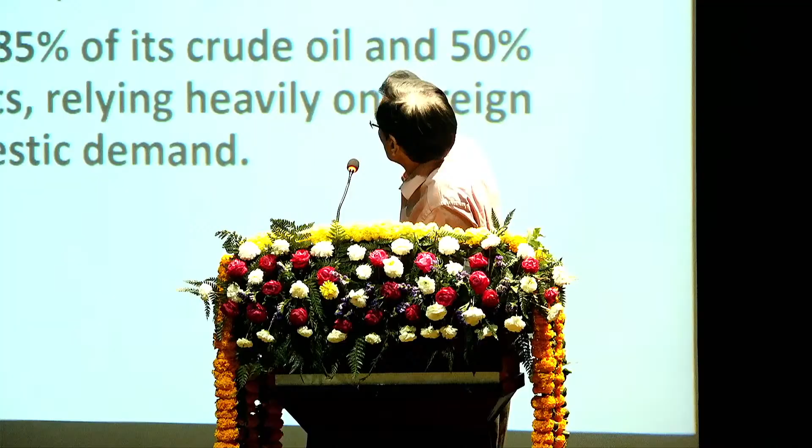Anyway, let me now concentrate on coal. So now, Atmanirbhar Bharat wants to go to net zero emissions by 2070. As of 2025-26, India is the third largest consumer of energy, and we are the third largest producer of electricity also. So the India is the third largest consumer of oil, and we are vulnerable to global price.

Now we are at the same situation. Yesterday I was watching, in Pakistan there is no electricity after 8 o'clock. Fortunately, we have Modi ji, so we are happy. We are having all these, we are still not affected. But there's going to be a lot of problem because of the oil shortage.

India is the second largest producer of coal in the world after China. Earlier we used to mine 250 million tons of coal. Today we are mining 1 billion tons of coal. You can imagine, we are burning 1 billion tons of coal, how much fly ash we are generating, and that fly ash has to be utilized. That is also one of the major problems.

It has to be used in cement plants, for brick making, and other things also. So 50% of installed power capacity is solar energy based, but most of, as I told you, 70% of electricity is coming from coal only, burning coal only.

Well, you see, the government of India, there is a lot of pressure now. They want to shift from coal to solar, wind, and other things. But we have large reserves of coal. What to do with those?

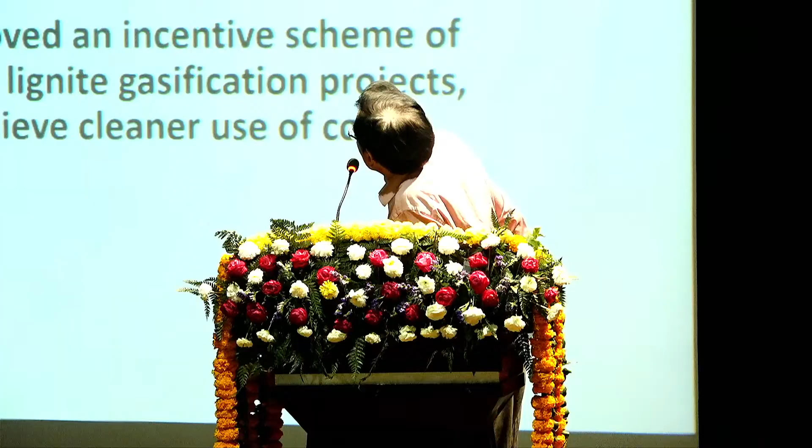Okay, well, the government has production-linked incentives, so it is promoting coal gasification. As far as gasification of coal is concerned, as I told you, Indian coal is having high ash. So in situ ash content in Indian coal is 35%. So it is not a joke to gasify, to partially burn this coal.

We had 3 coal gasification plants, Talcher, Ramagundam at Neyveli Lignite Corporation, and we were using the entrained bed process, Koppers-Totzek. And those were for fertilizer plants, fertilizer plants were based on that. And those plants almost failed, and those have been stopped.

But now interest has revived in setting up coal gasification again. Coal India Limited has signed a memorandum of understanding with BHEL, GAIL, IOCL. BHEL has plants on fluidized bed gasification of coal. They had a pilot plant. EIL also had a pilot plant. CIMFR also had several plants. The ministry had invited me to give a lecture.

So I told them we have to do research on Indian coals, and we should do R&D. We should sponsor projects to IITs and universities so that some research is done on how to gasify Indian coal having such high ash content, and which process will suit - whether fixed bed, entrained bed, or fluidized bed.

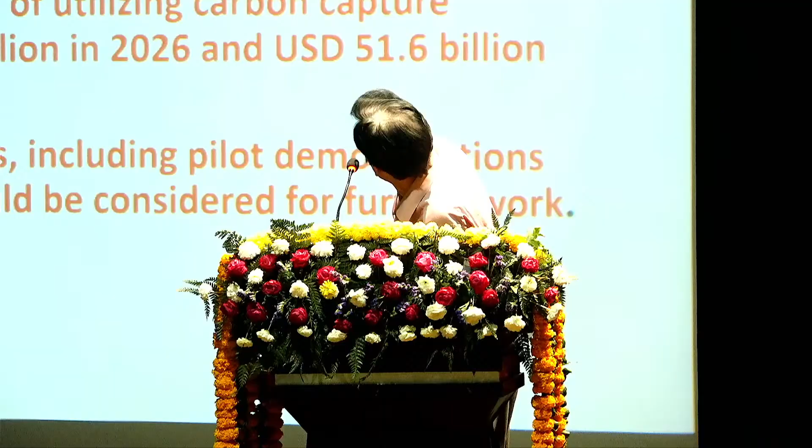What I feel is that we can continue to use coal if we can sequester and capture the CO2 and utilize it for value-added uses. We have extended some research at IIT, and a lot of research has been done. In fact there is a lot of funding - around US dollar 5 billion in 2026, and this will become almost 51.6 billion by 2030, according to IEA. There is a lot of work going on, with successes reported, and pilot demonstrations by BHEL, CIMFR, and at IIT Delhi.

CCUS technologies may allow continued use of coal. That can be very good for India. We can even have IGCC power generation - integrated gasification combined cycle power generation - where capture of CO2 is very convenient and very easy.

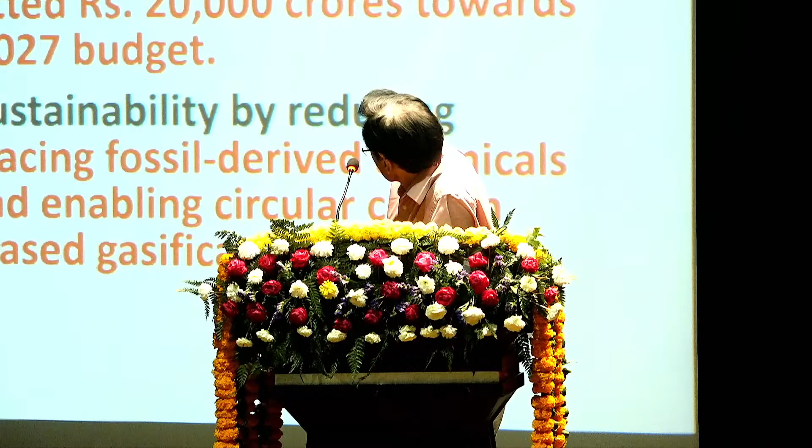The Indian government has committed 20,000 crore towards this in the current budget, 2026-27. Coal CO2 utilization contributes to sustainability by reducing greenhouse gas emissions, and replacing fossil-derived chemicals with CO2-based alternatives may enable a circular carbon economy.

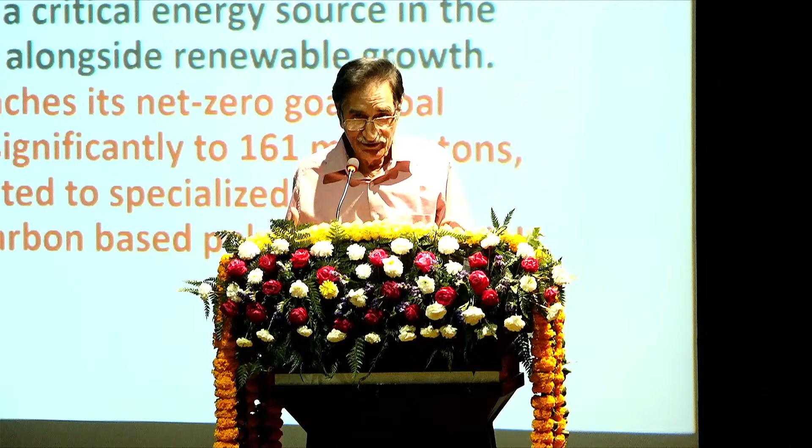Future-proofing coal assets as renewable energy penetration grows means diversifying non-fuel uses of coal. The future outlook: despite this shift, coal will remain a critical energy source, though by 2070 it is planned to come down to 161 million tons per annum. But I doubt it, as far as India is concerned we have only coal. We are going for ultra supercritical boilers where CO2 emissions are less, and more and more mines are being auctioned, so more thermal power stations would be set up. I doubt it, but I am a coal man - you can take it with a pinch of salt.

We worked on coal at IIT Delhi for almost 42 years, covering almost every aspect of coal. We worked on converting coal into oil, through solvent extraction followed by hydrogenation of the solvent extract to get petroleum-like fuels.

Then we worked on gasification of coal. We even used CO2, we used steam, and got synthesis gas. We also did some work on carbonization of coal, that is pyrolysis of coal, which is heating the coal in the absence of air in an inert atmosphere. There we get coal tar and other coal gas, and we also get some char.

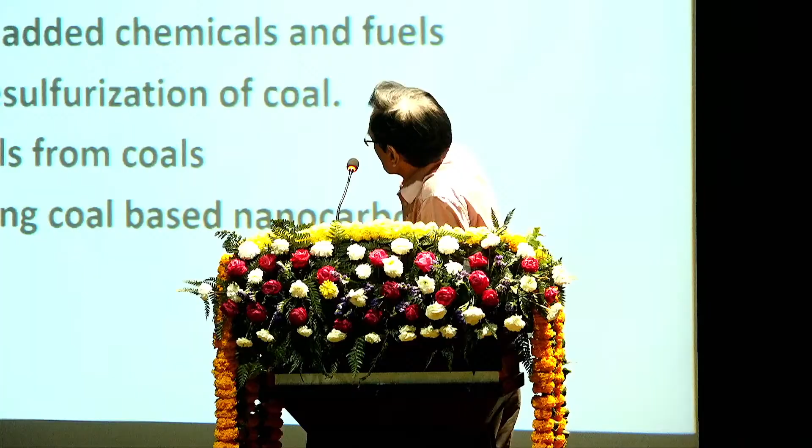Then we worked on refining the coal - organo refining, inorgano refining - and we worked on other clean coal technologies like biodesulfurization and chemical desulfurization of coal.

India is very fortunate. We have only 0.5 to 0.6% sulfur in our coal, whereas Western coals have high sulfur. But our lignites contain almost 5 to as high as 10% sulfur. Assam coal, which is a good quality coal, has ash around 5 to 10%, but sulfur contents may be as high as 5 to 10% even. We have worked on Assam coal also.

Then we tried to convert coal into graphite through graphitization, and we also converted coal into carbon nanomaterials such as graphene and multi-walled and single-walled carbon nanotubes and other carbon materials. Then we used those graphene and carbon nanomaterials for producing carbon-based nanocomposites, which have better conductivity, better EMI shielding properties, better thermal conductivity, electrical conductivity, and mechanical strength.

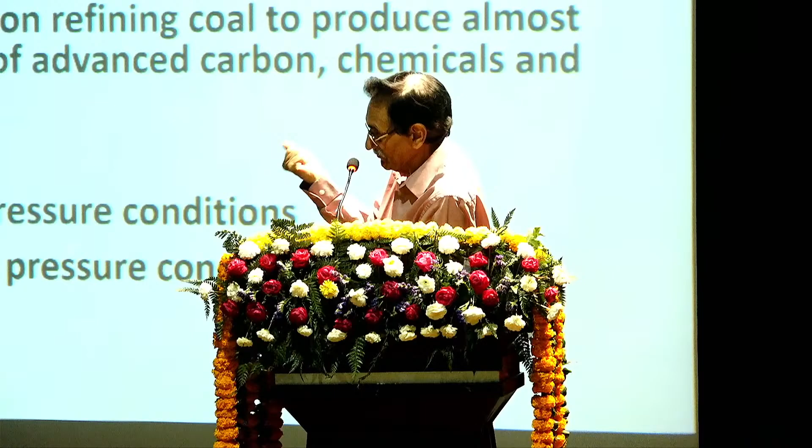I've already discussed how we started our research. Then ultimately, when oil prices became very cheap, we thought of concentrating our research on refining coal to get low ash coal and improving the washability characteristics of coal, which we thought of doing through organorefining. Coal contains organic matter and inorganic ash, inorganic mineral matter. So if you use some solvent which can dissolve and extract the organic matter, what will be left behind is inorganic matter, with less ash, to prepare chemicals. The other approach was inorganic leaching, where you use alkali or acid to remove inorganic matter and leave the organic matter behind. So we worked on both parallel approaches.

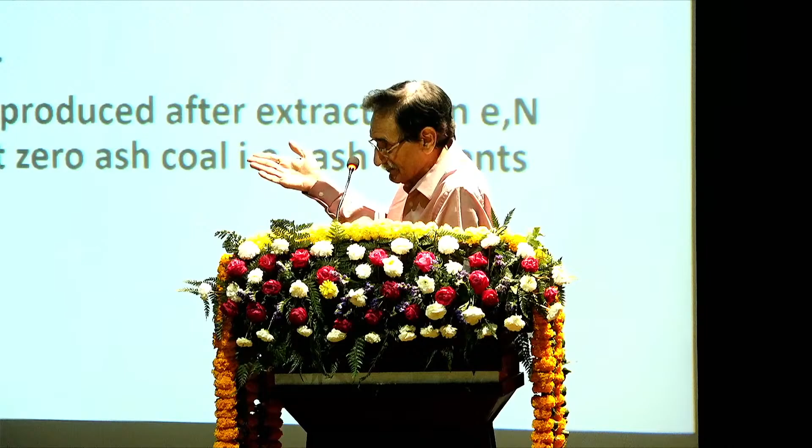clean coal. We called it super clean coal because it has very little ash, varying from 0 to 2%. So we published that paper, and there was a lot of hue and cry in India. People said it was something very unusual - how can you have zero ash coal? So a lot of discussions went on in CSIR, CIMFR, and DST. They gave us a project, and we proved that yes, coal can have zero ash also. In fact, the coal had 0 to 2% ash.

Next slide. We thought of using that super clean coal for getting graphene and carbon nanotubes. So we collaborated with NPL, and we used the DC-arc discharge technique to convert this super clean coal into graphene and

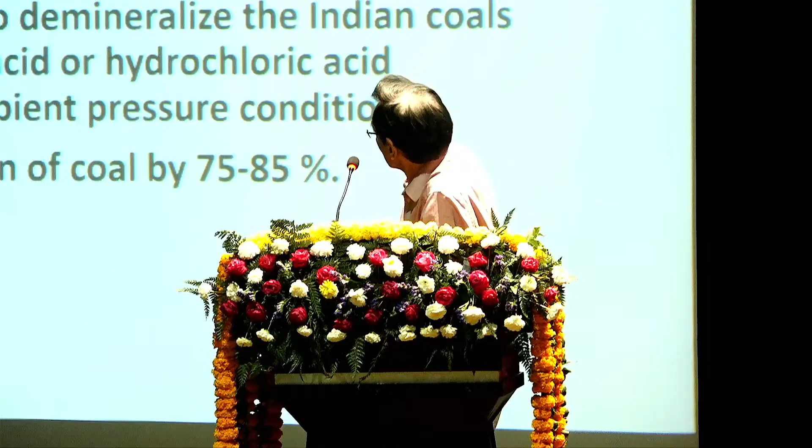Well, after we published that paper, people from Tata Steel came to my lab. They told me I had published that coal contains 0 to 2% ash, whereas they were pioneers in washing coals, and said as far as they were concerned, they couldn't go beyond 20% ash coal. I told them yes, this is possible. Then they sent their engineer to my lab, and we transferred that technology to Tata Steel. They set up a pilot plant at Kolkata. We filed several patents, including US patents, and they set up this pilot plant.

They set up another plant at Visakhapatnam based on inorganic leaching of coal. As Professor Subhash Sharma will agree, at IIT there is a lot of thrust on patenting and technology transfer. Professor Nigam used to pester us about how many technologies we have transferred to industry. I'm very happy to have worked with Tata Steel and transferred this technology to them. They have a mine containing 21% ash, and they use coking coal for their steel plants. With my technology, they can happily do that, but unfortunately this is not economical at present, so importing coking coal is cheaper for them. Still, they have this technology with them.

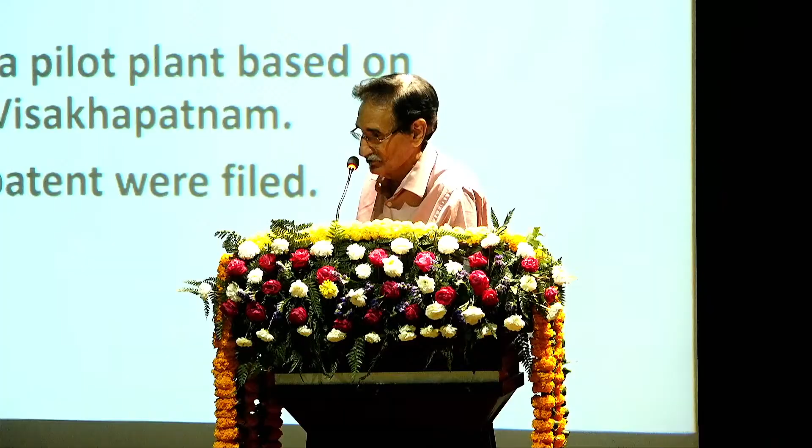We have also converted carbon dioxide into graphene using magnesium ribbon and nickel as a promoter. We used those graphenes for preparing polycarbonate nanocomposites, which had good conducting properties, thermal conductivity, electrical conductivity, mechanical strength, and EMI shielding properties.

I don't have much time now. We also did some work adding multi-walled carbon nanotubes into polycarbonate polymers, and we were able to improve its ballistic properties, so you can have bulletproof jackets. We did this work in the mechanical engineering department at IIT Delhi, in Professor Naresh Bhatnagar's lab.

That's the detail of how we did it. Then we improved the ballistic properties.

In conclusion, I would say that we were able to clean the coal and transfer the technology to Tata Steel, and they have set up a pilot plant. Then we were able to convert the coal into carbon nanotubes, multi-walled carbon nanotubes, and graphene, and use those for preparing nanocomposites which are very useful in industries. We also could improve the ballistic properties of these. Thank you very much, I'll be very glad to answer your questions.

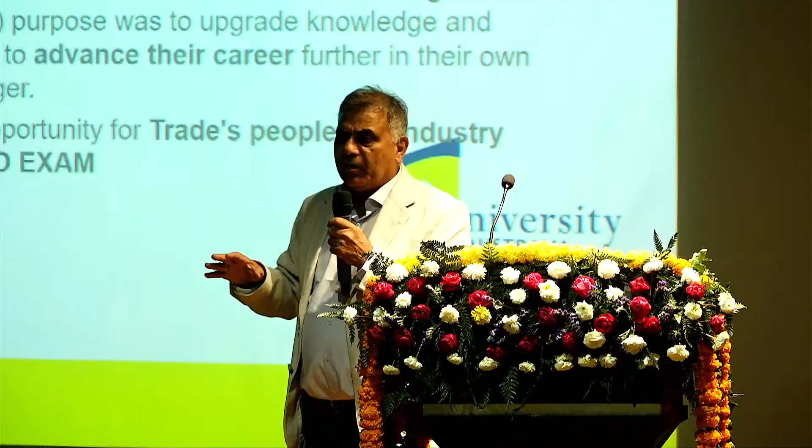Especially, the course that I was heading, not now, I stepped down, is the asset and maintenance management program. As a mechanical engineer, you might have noticed there are heat, thermal, production engineering, manufacturing engineering, and so on. But this asset or maintenance management course evolved on a direct demand from industry. That demand was from Queensland Alumina Limited—those people approached us and said they wanted to give training to their staff and make them maintenance experts. That is how it started.

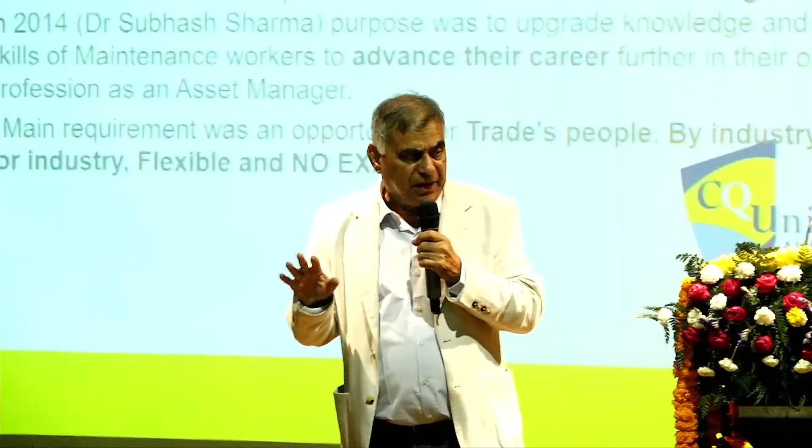But in 2014, when the ISO standards came into the market—ISO 55000, 55001 and 55002—I was given the responsibility to develop a course based on asset management rather than maintenance management. Maintenance is a subset of asset management, whereas maintenance engineering itself is a subset of mechanical engineering. Please, next.

We have got around 32,000 students, and at the moment we have 16 campuses because 10 campuses have been either merged or shut down. Most of the teaching is via long distance, or online. So this is Australia.

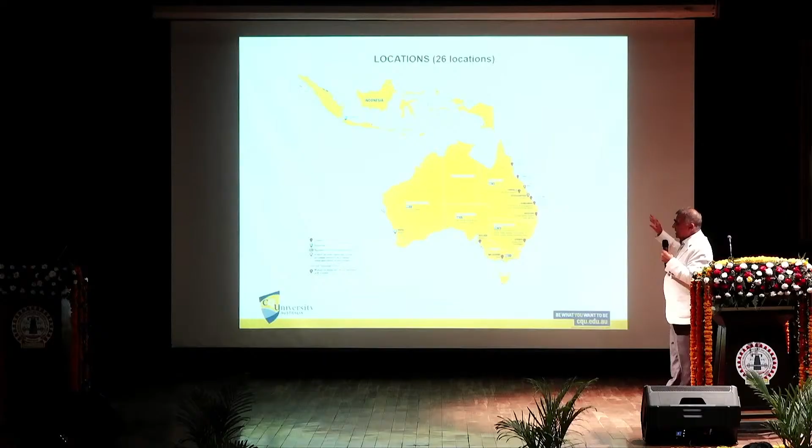Over here you could see that there are so many campuses. Along with that, there is a campus in Indonesia. Earlier it was in Singapore also. And recently we had a collaboration with Kuwait, that is a research collaboration.

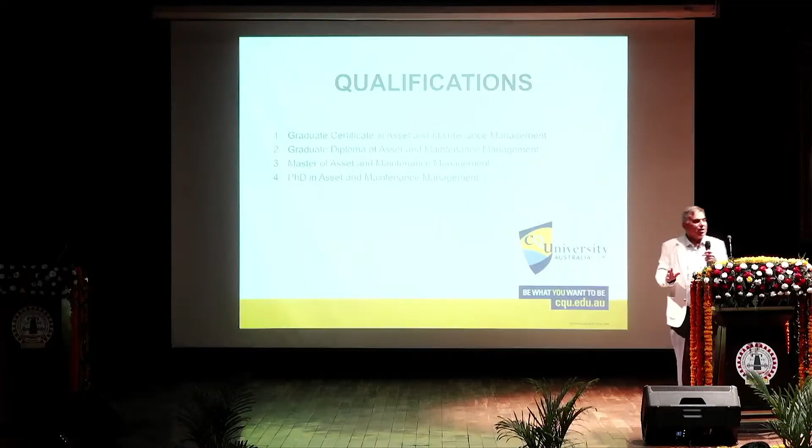I belong to asset and maintenance management, so graduate certificate, graduate diploma, masters and PhD, these are the degrees that we give, and we have got about 400 students altogether.

So what we teach under this is procurement, operation, maintenance and disposal. Any item or entity or a thing, it has been written in the definition like that. Anything or entity that has a value, that is an asset.

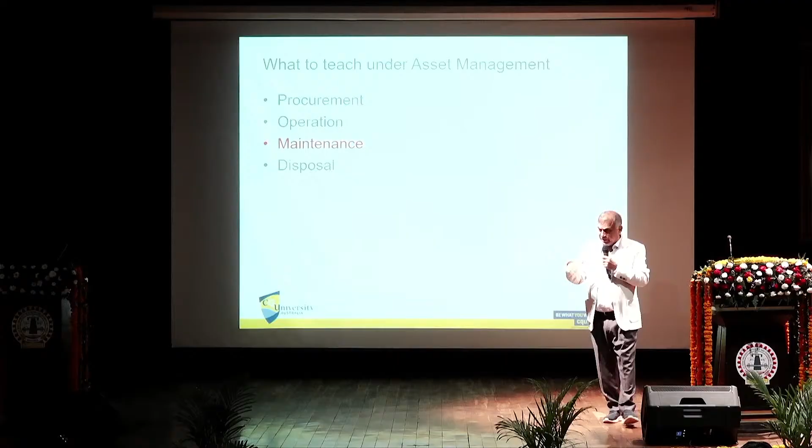Like Dr. Sharma was saying, the fly ash that is coming out, if it has got a value, that is an asset. So you have to extract that value, you have to realize that value out of the product or the asset. That is the purpose of this engineering. And as a mechanical engineer, any industry that is asset intensive, that is where our main focus is.

Say, for example, 2600 BC, people had these carts in Egypt. That means it shows that people had those manufacturing capabilities. And if they had manufacturing capabilities, they too had a concept, maybe a vague concept of rolling motion, because there are wheels and there is an axle. So if that is there, likelihood that by that time people might have developed a lubricant as well.

Though evidence of lubricant in Egypt comes a lot later, not in 2600, but maybe 1500 BC or something like that, people used to use lard oil to transport big structures. So the lubrication concept was not well understood, but it was there.

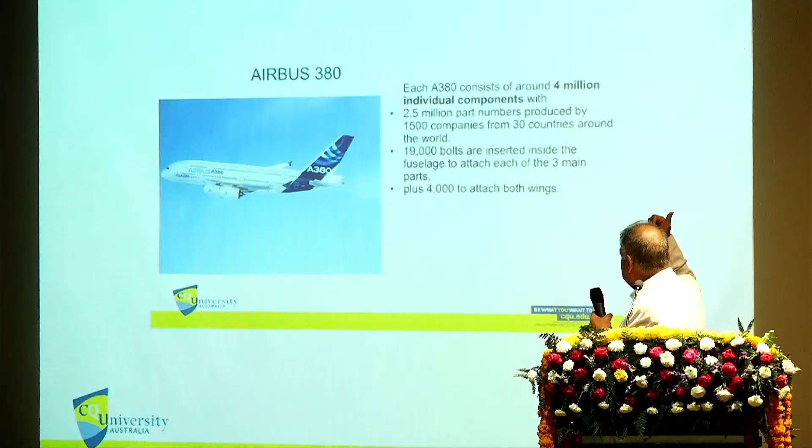You people might have heard that in any industry you go, there's a top boss, then there is a department, and the department is the human resource department. There may be power generation or accounts and this and that, and then there is a human resource, HR department. So the HR department handles human beings, their induction, their training, their retirement, all those things.

But if you have seen or not, any industry, they don't have a similar parallel ground, any asset department like HR department. And that is what is happening now, that people are realizing that like human beings are being managed, we should manage the assets as well. So that used to be.

Now, a simple thing, like in the morning I said, the plan, do, check, act. Here it's plan, acquire, operate, maintain and dispose. Any entity or any asset that you have passes through these stages. You have to plan whether you want to procure, whether you want to hire, whether you want to build, whatever you want to do.

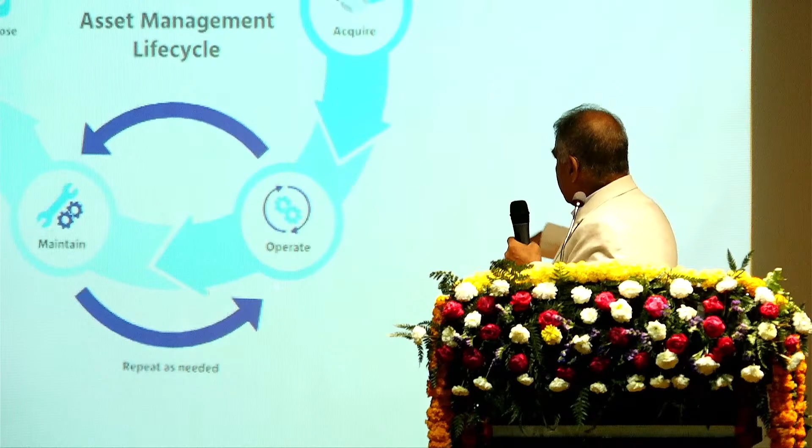And then you acquire that. After acquiring, you use it. So when you are using this asset, that may be a machine, that may be a computer, that may be a table, whatever it is, during that use is when you need maintenance.

So maintenance, and then when its life is over, we will say why life is over. Basically, it should never be over. But when, due to normal wear and tear, the components don't perform the function for which they have been designed, then you call it failed.

And if you repair it, if it is beyond the cost effectivity, then you dispose it off. And disposal means a responsible disposal, not like batteries, you put it in the normal dustbin. So that is called the asset life cycle.

Anything that reduces life cycle costs, that is asset management principles, asset management leadership, risk management, data management, continuous improvement, reliability, health and safety, asset management tools, environment standards. So all these things are associated with those machines with whom you will be working if you are working in an industry.

When you deal with this, anything that reduces the life cycle cost, it's not like you have dug out the lithium and made the battery, and in order to take out say 10 grams of lithium, you might have excavated say 20 tons of earth, and spent more energy excavating rather than getting the 10 grams of lithium. I'm just giving you an example.

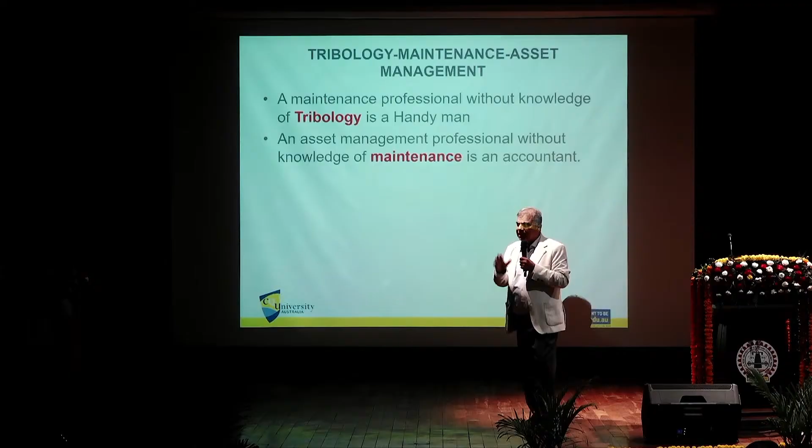Here I want to say that when you are working in an industry, anybody who is a maintenance engineer, you can become a good maintenance engineer if you are clear about the fundamentals of lubrication, friction and wear. If not, and you are just doing repair, that means you are not doing a responsible job, okay? You are just like a technician.

I might give you an example. I did some consulting job, and they said my bearings are failing. When it's a cotton industry, I said, are you giving enough oil? They showed me a person giving oil, and oil is overflowing. But the thing is, where the oil should go, those are clogged, and he is putting oil everywhere. So if it is not at the right place, that means it's not the right practice.

So that means unless you have a good knowledge of tribology, you cannot be a good maintenance engineer.

Similarly about assets, when you are a maintenance manager, you are buying a machine, you are an engineer, you may be a production person, but decision is made by whom? By the accountants. They tell you that you have to buy the cheapest machine. And the operation people, the operator, wants the best machine no matter what the cost is. And the maintenance person who is responsible for maintaining that has no say.

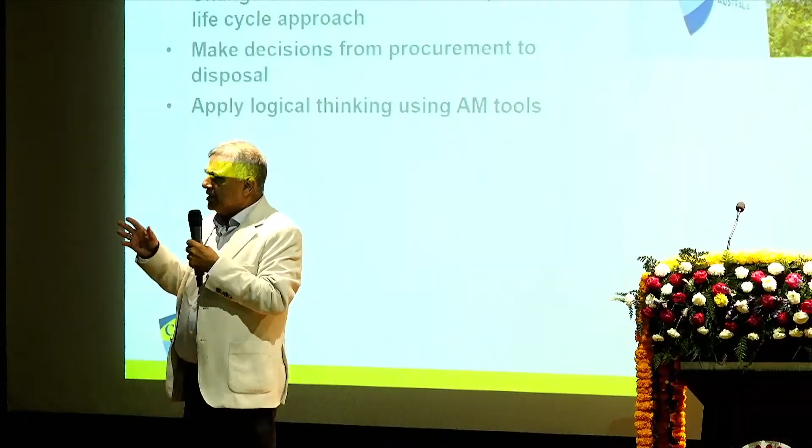So here, if you are a maintenance engineer and you do not have knowledge of assets, or if you are an asset manager and you do not have knowledge of maintenance, that means you are simply an accountant. So there is a difference between an accountant and an asset manager, and there is a difference between an engineer and a maintenance engineer who does not know tribology.

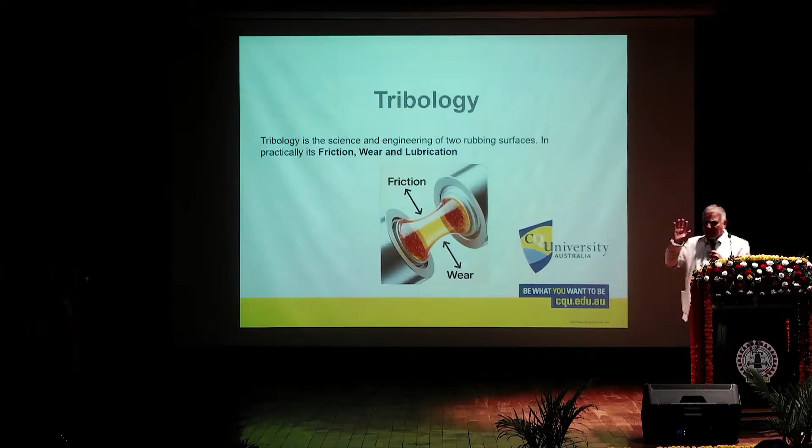So as such, there is friction and wear, and then there is lubrication. These three things are a must. I should keep a track of time, perhaps just show me, give me a signal when there are 5-10 minutes left. Go ahead please, next please.

The objective of tribology is basically to conserve material, conserve energy, and manufacturing efforts. By reducing friction, say in a ball bearing, how much is the friction? I developed equipment at IIT Delhi to measure the oil film thickness in a ball bearing, which is up to half a micron thick, and the friction there is hardly 0.001. So those are the kinds of things: conservation of material, energy, and manufacturing efforts. The bearing you buy for $20 or $10, what is the cost of the bearing? It's 100 grams of steel, which may be $2, but you pay $20 because of the manufacturing costs. So those manufacturing efforts are also saved.

Okay, please, next. I know I won't be able to cover the whole thing.

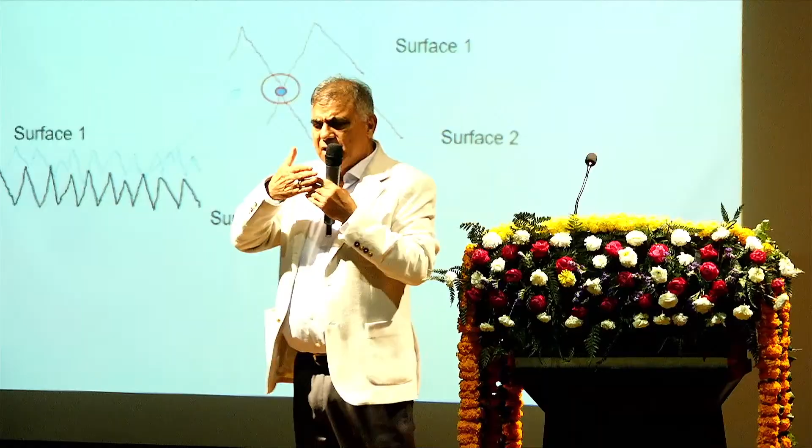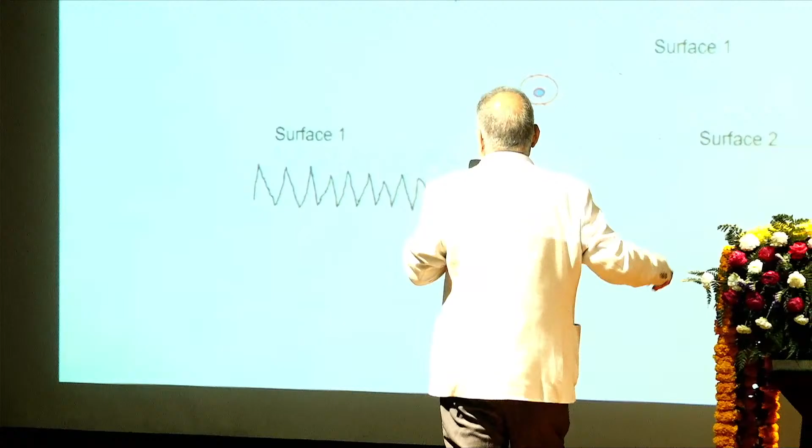Tribology principle as such: no matter how smooth two surfaces are, they are still rough. If it is a glass mirror type surface, it is still like 0.001 micron rough. When these asperities, these peaks, come in contact due to their own load or weight, what happens? They get fused into each other, and that phenomenon is called cold welding. So when you want to move one surface against the other, you have to break this weld, this cold weld.

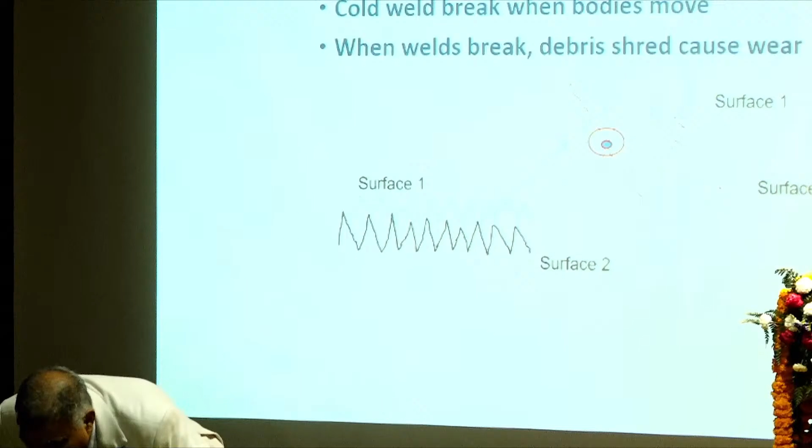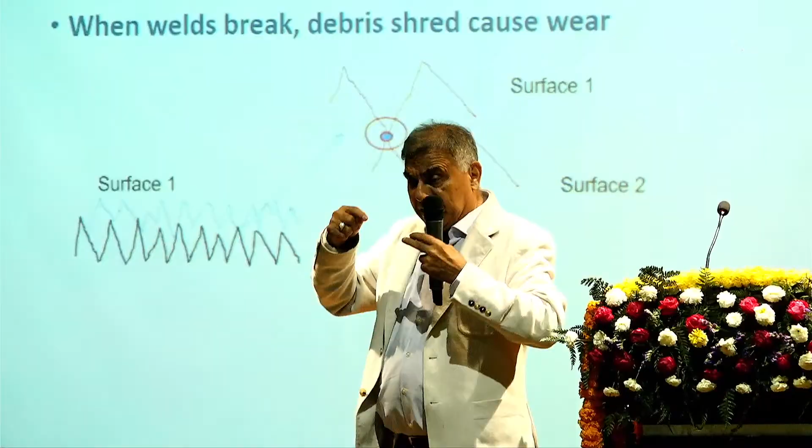Anyway, so this is the energy that you use, this is called frictional energy. You can't see with the naked eye, but if two needles, their points are touching each other, they get fused. When you try to break them, that is the friction. And if there is debris coming out, that is a wear particle.

So please, next. The friction energy could be spent in terms of heat, elastic deformation, noise, sound. All those things are forms of frictional energy.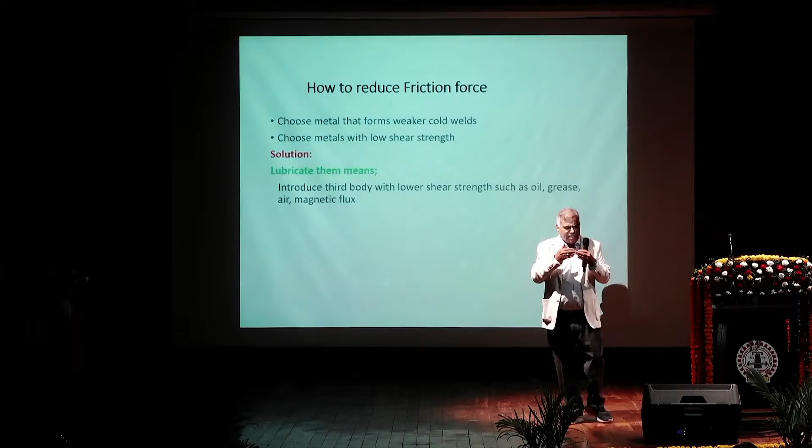So, okay, how to reduce friction? Reducing friction means that if you could reduce the shear strength of that cold weld joint, that means you have succeeded in reducing that friction. And how to do that? A smart thing is that you use a lubricant.

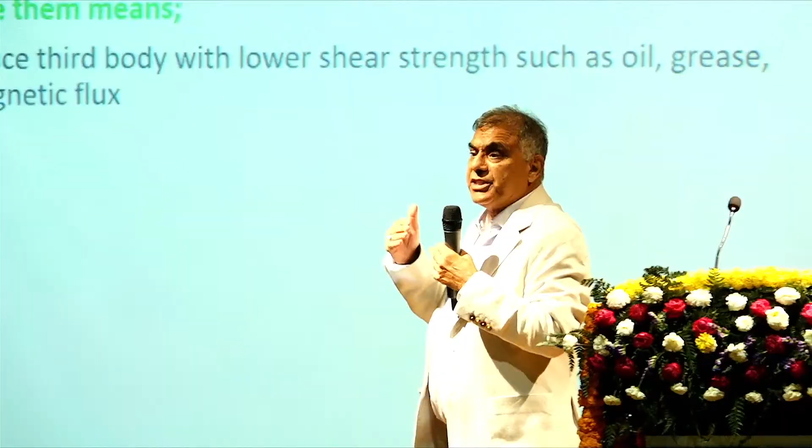That means you use a third body which has got low shear strength, and that is nothing but a liquid, or the lubricant, which is liquid. Shearing those liquid layers is a lot easier. Move forward please. But the question is, when one surface is touching the other, how to retain that liquid or fluid in between the two, where the moment you apply pressure, it flows out.

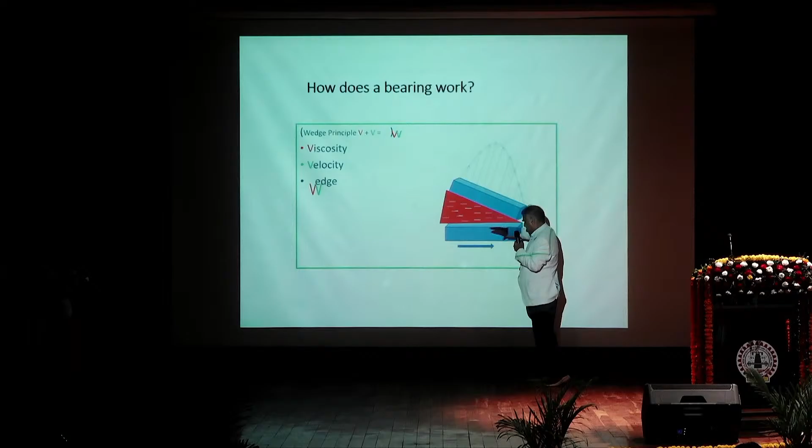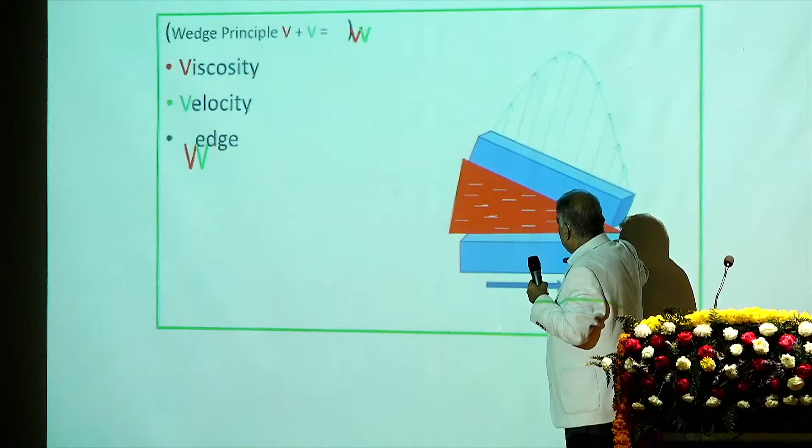Okay next please. So there are three things. If you make it a wedge shape, one surface straight, the other one a wedge, and then there is relative motion, that means it will retain the fluid in motion. By doing this, you have the new concept called bearing. So this is called bearing. In a roller bearing or sliding bearing, this is what happens: there is one surface tapered, and then a straight one, and in between there is a fluid.

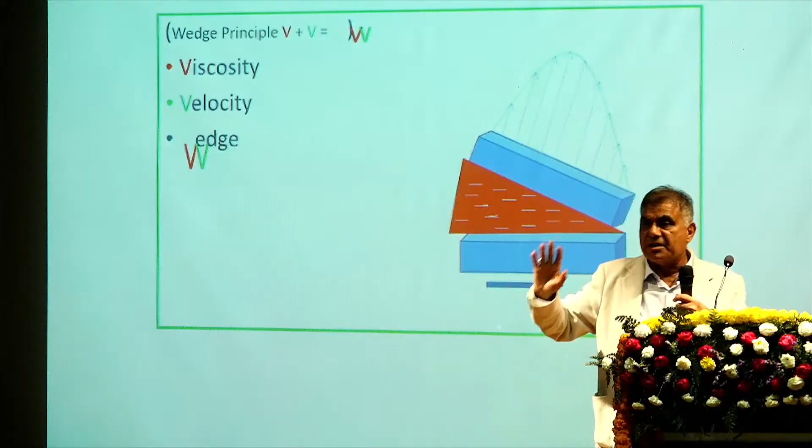So this fluid tries to pull the whole liquid through this small exit, and it creates pressure. That pressure, during relative motion, gives you the load bearing capacity. So that is how, even if you apply a lot of load, the oil goes nowhere — it has to flow through that. So that is the invention of that. Bearing was used, but the principle was not known for many years. In 1886, when Reynolds used the equation, after that people knew the principle of hydrodynamic lubrication in bearings.

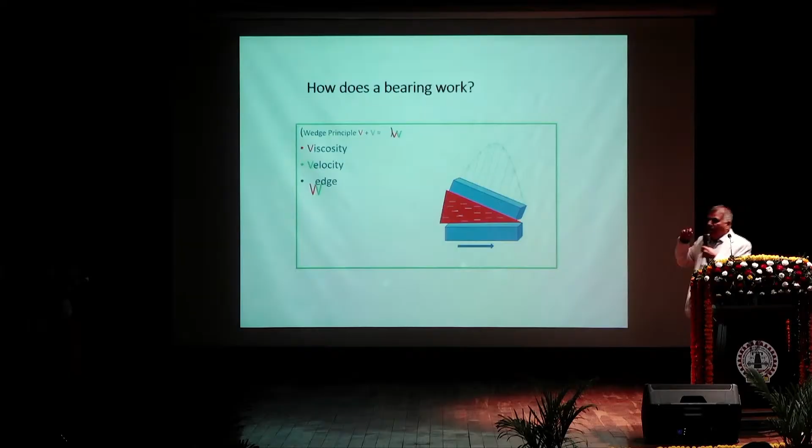Anyway, so when a bearing is in motion, there are different lubrication regimes. That's what happened, move forward please. Move on please.

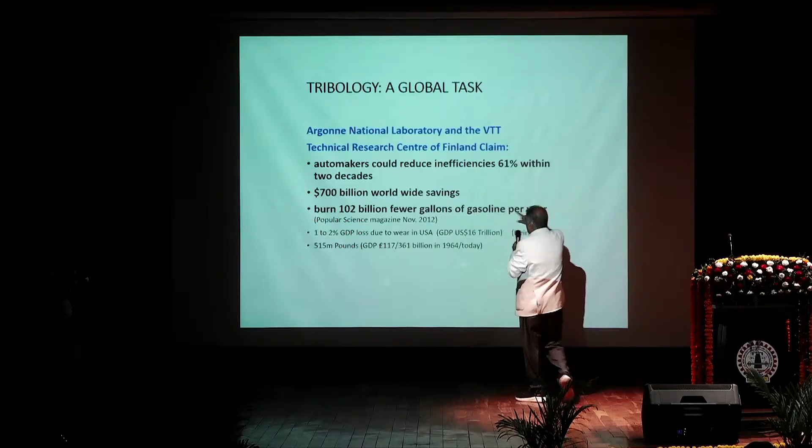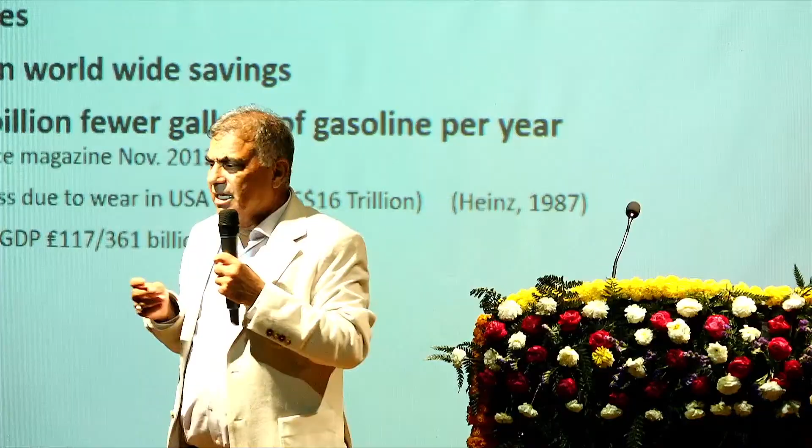Next. Now, as I said earlier, if tribology is properly used worldwide, automakers could reduce inefficiencies up to 61% within two decades, and up to 700 billion could be saved worldwide, burning 102 billion fewer gallons of gasoline per year, with a 1 to 2% GDP loss due to wear in the US, where GDP is about 16 trillion, and 515 million pounds could be saved in the UK. They suggested this, VTT, Dr. Holmberg — I met him 20, 30 years ago. He developed this data and is working hard in this area worldwide on how to reduce energy loss.

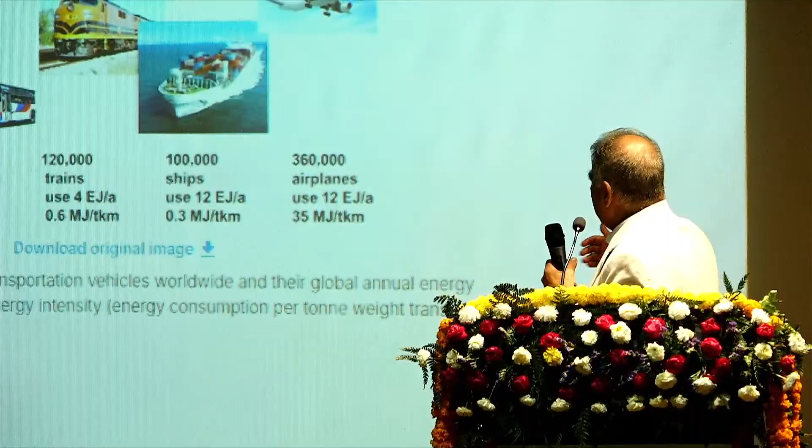Energy consumption, as you could see, in various types of industries, has been shown here. I will not go further in details. Go ahead, please.

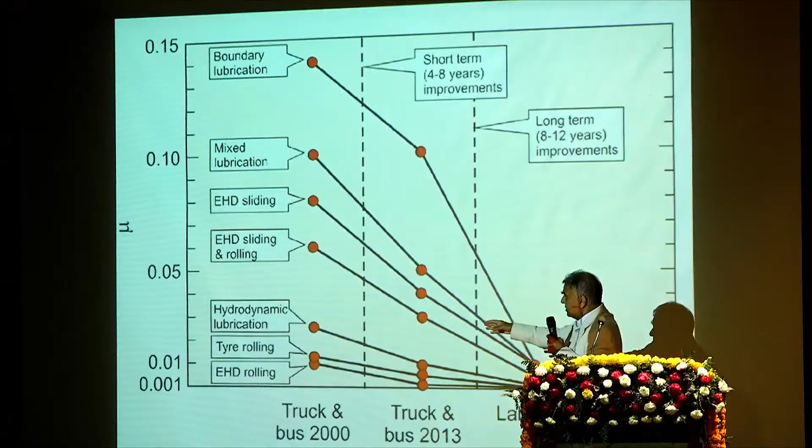This is again like in trucks and buses. There was a time when 0.15 coefficient of friction used to be, but back here in 2025, technologies have developed, and now it has come to 0.01 as well in trucks. That is due to improvising the methods of lubrication.

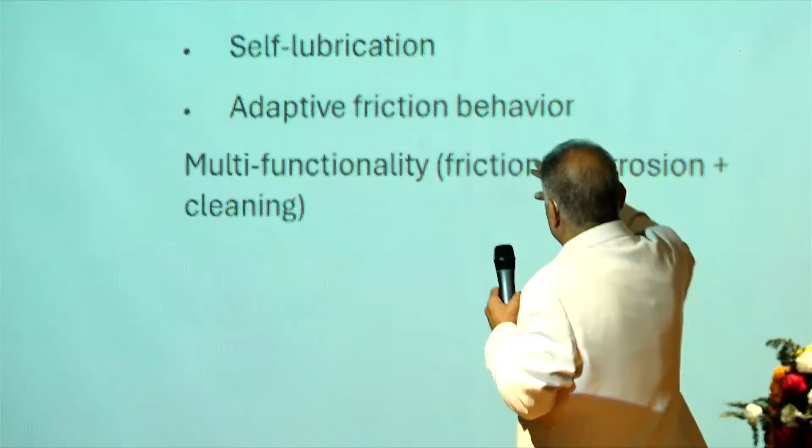Now, this morning I was telling you a new tribology research is going on, called mimic tribology or mimic biotribology. So key features of biomimetics are like surface texture, self-lubrication, adaptive friction, and multifunctional friction plus corrosion cleaning. These are the things learned from nature, and that is what is being adopted now.

And this is being used in various applications. This morning I told you that wipers are used in cars. If we make coatings like a lotus leaf, then you don't need wipers. The technology is already in process, but it's quite expensive.

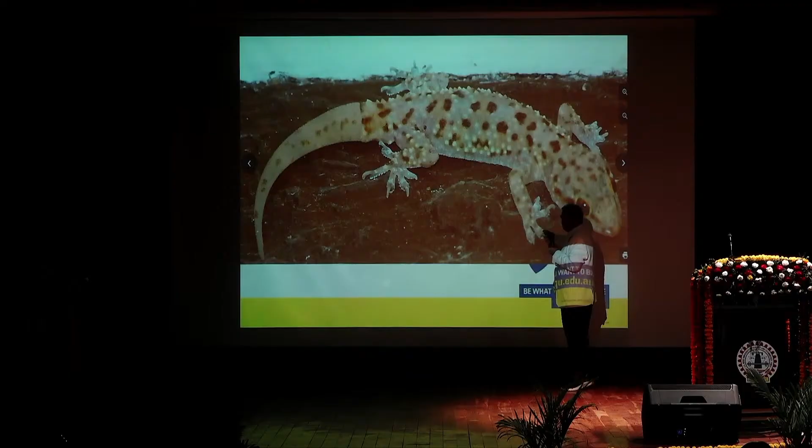Lizards, you know, on a vertical wall, due to suction with micro cavities, can climb up. So that adhesion type of technology needs to be developed, and research is going on.

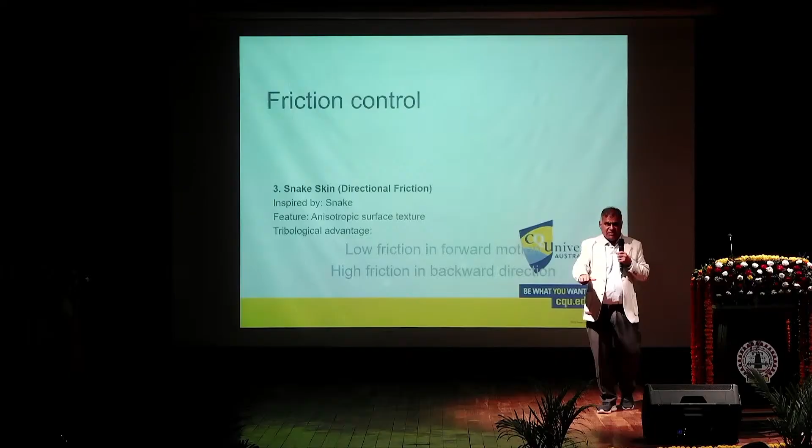Adhesion control, friction control - I told you like a snake can move forward with low friction, but when it comes back there is high friction. So that kind of surface needs to be developed so that similar things could be used in machines and other applications.

This is about snakes - unless they move like this, they cannot move forward. So that phenomenon has been explained. I don't have time to explain that in detail.

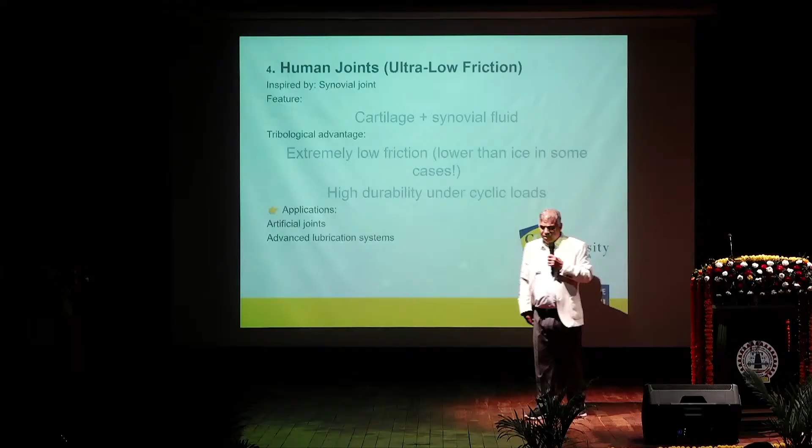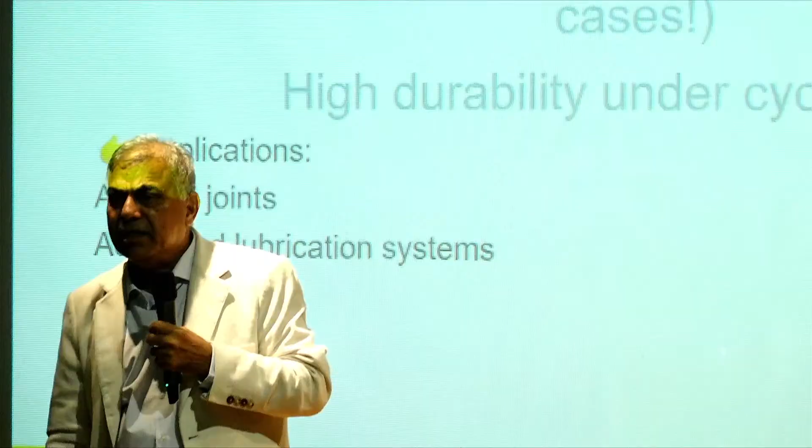Human joints, as you know, have cartilage and synovial fluid used between the two bones. So there is a cartilage layer being used, and that demands a lot of research. The reason being, when we are moving, it lubricates like a ball bearing, but when I'm standing still there is no pain. So that phenomenon - how by nature you lubricate a joint when you are not even moving - people are trying to understand more and more. When you are moving, that is understood well.

Since time is not enough, there are so many things - so many standards are coming in ISO standards for asset management. You can go next, please, and lubrication, especially nano additives.

Even Dr. Sharma was telling, graphene is used these days very commonly, using different types of materials, modifying surfaces, by which we are trying to reduce the friction. So that research is going on.

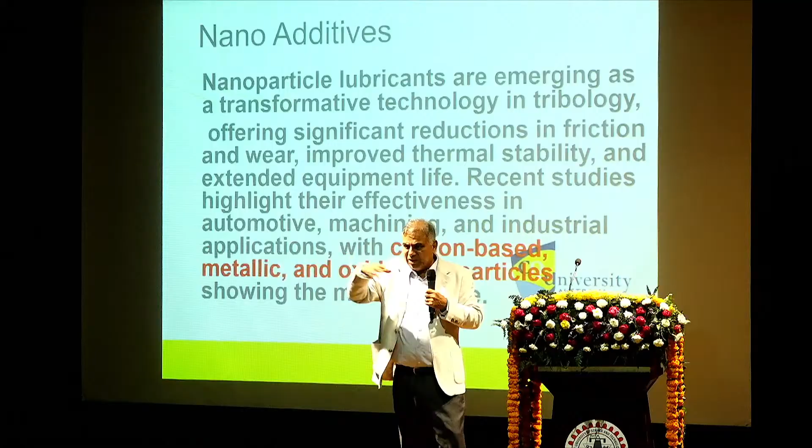And AI is everywhere, so you can apply it wherever you like, and that is being done, especially in maintenance - like using drones to monitor things, and you could do dual imaging, such kind of technologies. I'm even involved with a few projects like that in Australia.

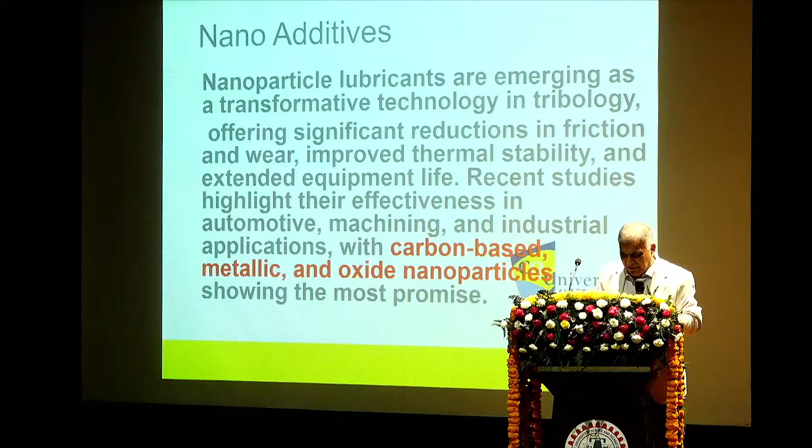I will not explain the whole thing because of the time constraint, but if you have any question, I'm more than happy to answer you.

Otherwise, you must be hungry and proceed for food. Quick up.

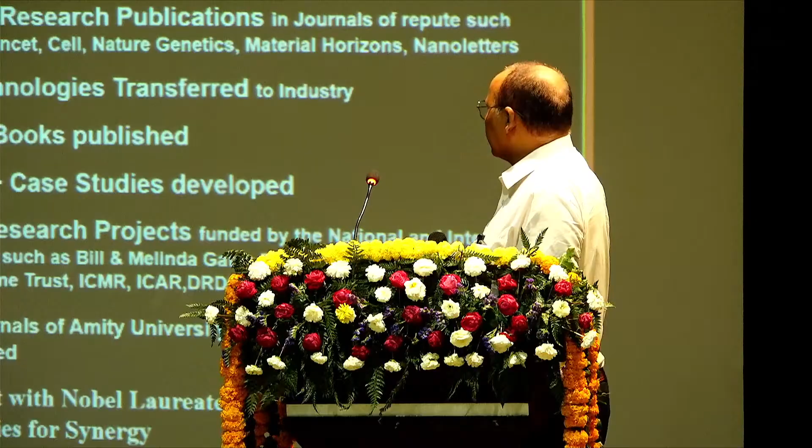In terms of research, our university H-index is 204 plus. We have several publications, have transferred many technologies, published many books, and have many research-funded projects. The Mechanical Engineering department alone has 5 research-funded projects from various funding agencies like BRNS, DST, DRDO, etc.

So the content of my talk, you can see in these slides. First I will give an introduction to condensation—this is fundamental, like film-wise and drop-wise condensation, which I'll brief about. Then I'll talk about altering surface wettability, like surface morphology, how it affects wettability, and how to estimate this surface wettability. Then I'll talk about fabrication of wettability gradient engineered surfaces. Then we have surfaces demonstrate atmospheric water harvesting, device development, and conclusion.

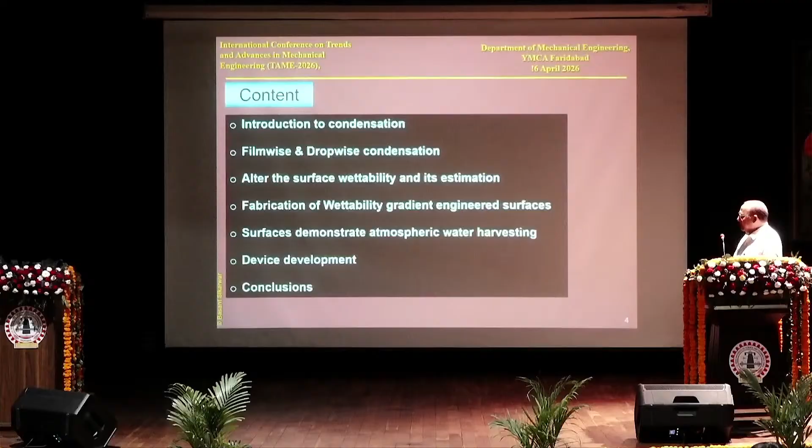When vapor comes into contact with a surface whose temperature is below the dew point temperature, it will condense. There are two forms of condensation: one is filmwise condensation, when the vapor forms a film on the surface. When vapor condenses in the form of drops at small nucleation sites, this is called dropwise condensation.

In terms of transport coefficients, dropwise condensation heat transfer coefficient is at least one order higher than filmwise condensation if the degree of subcooling is very low. If the degree of subcooling is large, then the dropwise condensation heat transfer is drastically reduced. So people are thinking about how to make dropwise condensation more effective, because when subcooling is low, the condensation coefficient is at least one order higher than filmwise condensation.

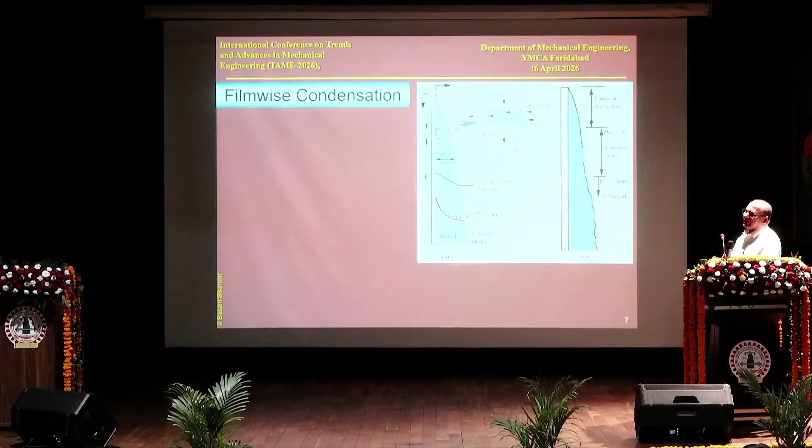Film-based condensation, as I told you, forms a film on a surface. This is explained by the well-known Nusselt theory, which gives the heat transfer coefficient. Nusselt theory is based on a combination of momentum equations and energy equations; when we do the energy balance and momentum balance, we get a simple formula given in many fundamental heat transfer textbooks. This gives the average heat transfer coefficient for filmwise condensation, which many books explain well.

Next, dropwise condensation—let's click the video.

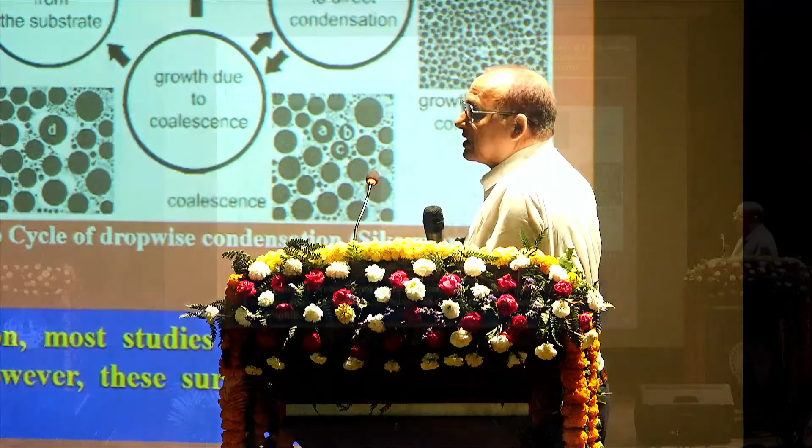Yes, so you see that this is the condensation on a hydrophobic surface. Water forms at special nucleation sites in the form of droplets. It grows by direct condensation and coalescence. Then it slides off or falls off, depending on the gravity direction.

When you see it, it is a kind of continuous process. We have the formation of the droplet at a specific nucleation site - this is called nucleation. Then growth by direct condensation, then growth by direct coalescence, then slide off, which re-exposes the surface for recondensation.

That's why it is an efficient method, because it automatically re-exposes the surface. It provides less thermal resistance, and because of the less thermal resistance, the condensation rate is very high. You can see here the drop coalescence, and there is jumping of droplets also, which I am not discussing in more detail.

Next slide. So for dropwise condensation, we need a hydrophobic surface, a super hydrophobic surface. The ideal surface for dropwise condensation is a super hydrophobic surface with low contact angle hysteresis - that is one important thing.

In nature, most metallic surfaces, like copper and aluminum, are hydrophilic in nature. They have high energy materials, so we have to alter the morphology of this surface.

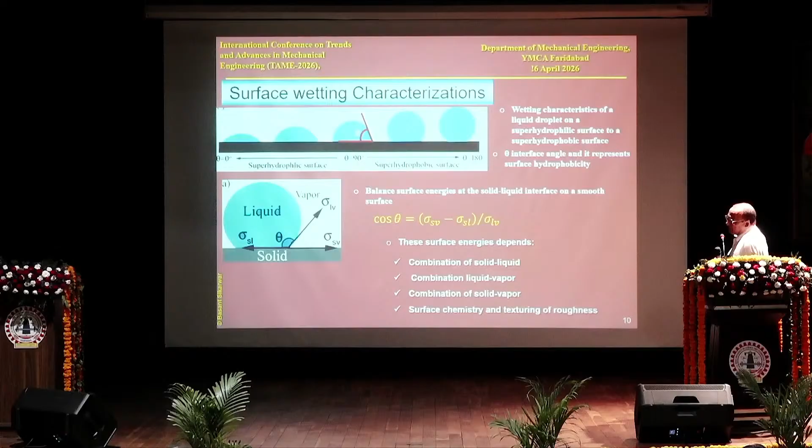Contact angle can be found out by Young's equation. It is the balance of three surface energies: solid-liquid interface energy, liquid-vapor interface energy, and solid-vapor interface energy. This energy balance is called cos theta. When theta is less than 90, we say it's a hydrophilic surface; super hydrophilic surfaces have contact angle less than 20 degrees; and super hydrophobic surface contact angle is more than 150 degrees.

Next slide. Many engineering materials are hydrophilic or super hydrophilic - Teflon is one material people use to provide coating on metallic surfaces. It forms hydrophobic surfaces when contact angle is greater than 90 degrees, and super hydrophobic surfaces when contact angle is more than that.

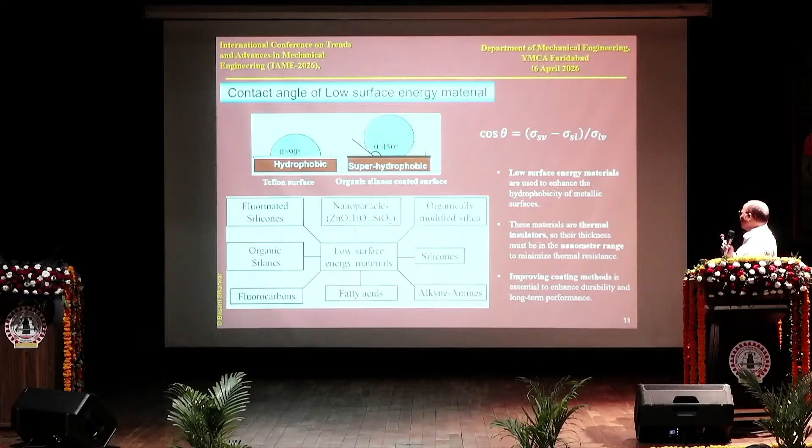For this we have to treat the surface with organic silane coatings, all these things. So if you see the materials used for coatings, like fluorinated silicones method, nanoparticle methods, organic modified silica, organic silanes, low surface energy materials like silicones, fluorocarbons, fatty acids, alkyne-amines - all these low surface energy materials are used to enhance the hydrophobicity of metallic surfaces.

But what happens by nature is all these materials have low thermal conductivity, so coating thickness optimization is very, very important. If you take large thickness, it provides additional resistance, which is not beneficial for condensation. If you provide small thickness, there is a problem of leaching, stability issues, or long term stability issues. So making coatings and achieving super hydrophobic properties on metallic surfaces is one of the big concerns for researchers.

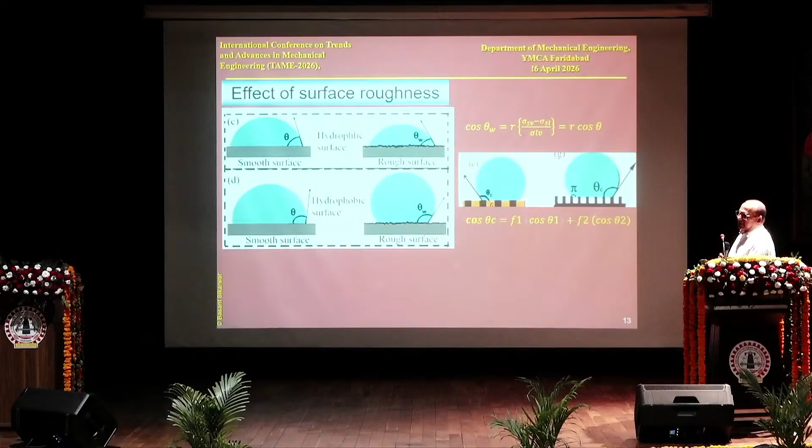As you know, my target is to enhance the transport coefficient of condensation, so I am only focusing on metallic surfaces like copper and aluminum. These are the two surfaces which are more and more popular for use in energy systems and such. Next slide.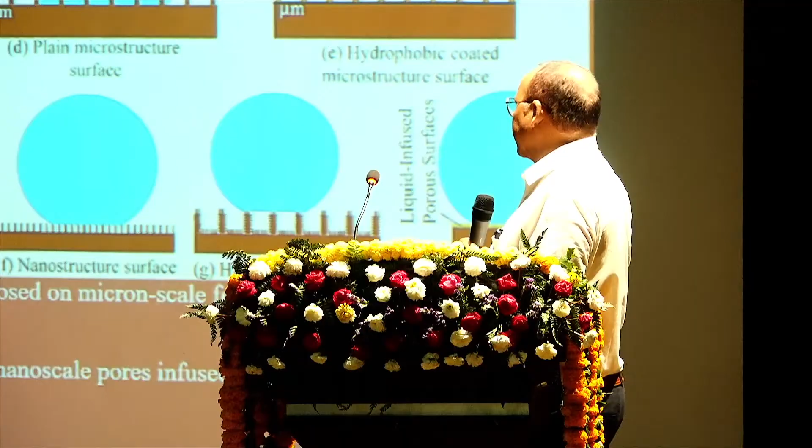Basically, contact angle hysteresis quantifies the retention force provided to hold the droplet on a surface. You can see in these slides, and generally we quantify this in terms of a dimensionless number, the Bond number. We say that if the Bond number is greater than 1, then the gravity component overcomes the surface tension force, and the droplet will slide. When less than 1, the droplet will not slide, it stays held on the surface like this.

Most of the time our interest is how fast a drop slides, how small a droplet is when it slides, all these things. And there is one easy method to measure the contact angle.

This is the pushing and pulling method. You put the drop on a surface and push the water droplet so the droplet grows. Whatever contact angle appears during growth is called the advancing contact angle. When you pull the droplet back using the micro syringe pump, this is called the receding contact angle.

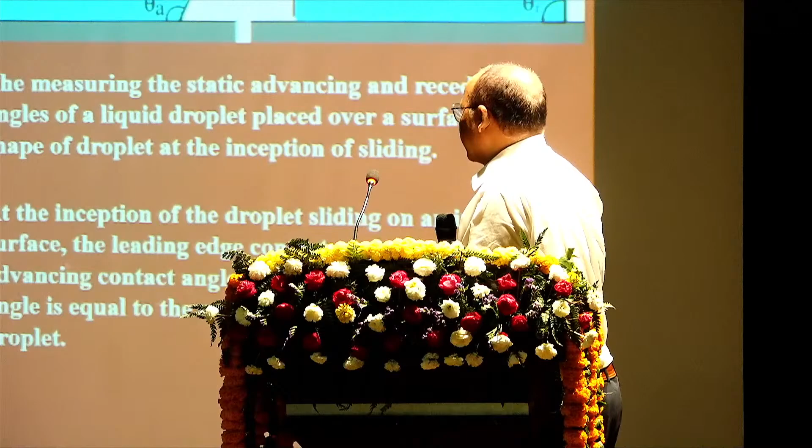This is the setup, a very indigenous setup. You know there are commercial surfaces available in the market, but this is indigenous, and one uniqueness of this setup is that it can also measure the dynamic contact angle.

Most goniometers available in the market only have the capability to measure the static contact angle and contact angle hysteresis. But this setup has the uniqueness to measure the dynamic contact angle also. Dynamic contact angle plays a very important role, and we use it in modeling droplet sliding on hydrophobic surfaces.

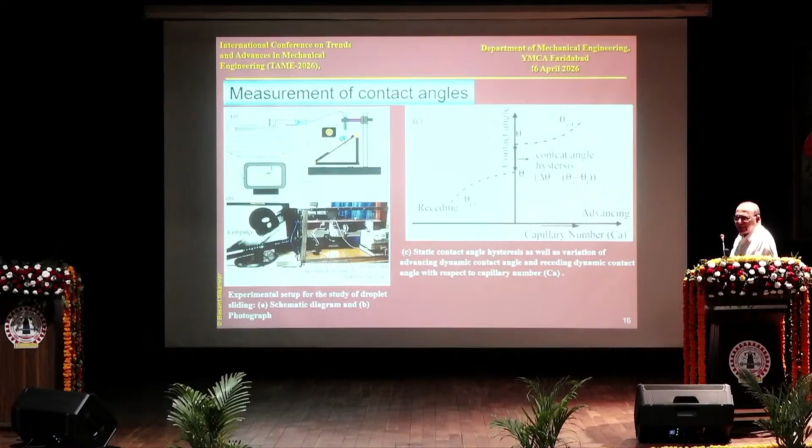Fabrication of hydrophobic surfaces: I am giving a basic brief about measurement of contact angle, surface morphology, and the effect of surface morphology. Just 2-3 minutes on this.

These are the methods and materials for fabrication. We use physical texturing, chemical texturing, and coatings of low surface energy, all these things.

This is the schematic diagram of all these methods generally used in our labs. We use laser ablation, plasma deposition, plasma etching, chemical vapor deposition, chemical etching, spray pyrolysis, dip method, electrodeposition, and self-assembly monolayer deposition.

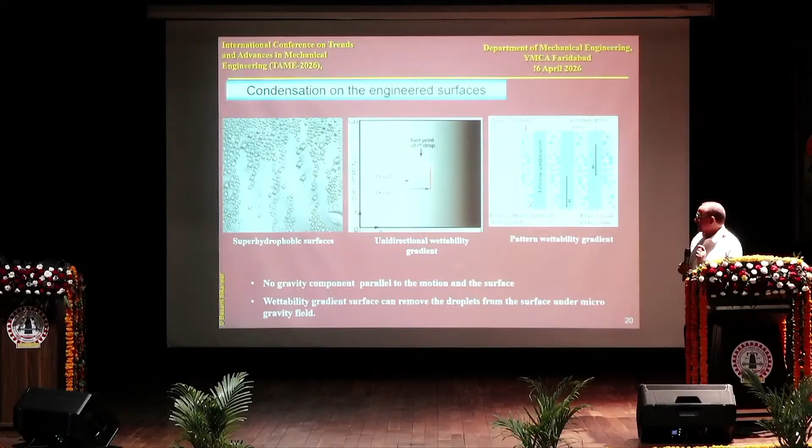Basically, I am interested in three types of surfaces. One is a super hydrophobic surface with low contact angle hysteresis. Second is a unidirectional wettability gradient surface.

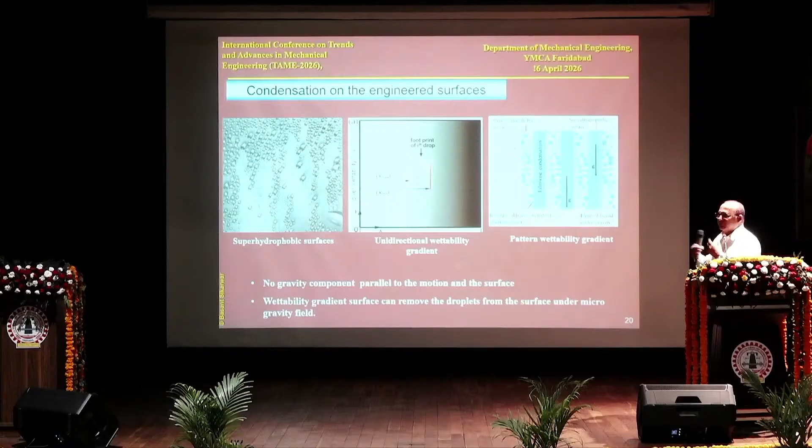I have an ISRO project where people are trying to produce water from humid air in space applications like space stations, where humid air from the surrounding environment is available because they need drinking water. They use various methods to recover this unused water. Why wettability gradient? Because drop-wise condensation is more effective under gravity on vertical surfaces, since the drop slides due to gravity. In a unidirectional wettability gradient, the capillary force and wettability gradient play an important role in removing the droplet.

And one is a pattern surface - patterns like hydrophobic and hydrophilic regions. Nowadays this is very effective, like you see in most leaves. So the pattern is like hydrophilic and hydrophobic regions, and we are trying to apply the same principle here.

These are the methods for preparing hydrophobic, super hydrophobic surfaces. This schematic flow chart shows chemical etching by NaOH, then hot water treatment, then texturing the aluminum surface, then chemical modifications. This is a very simple process.

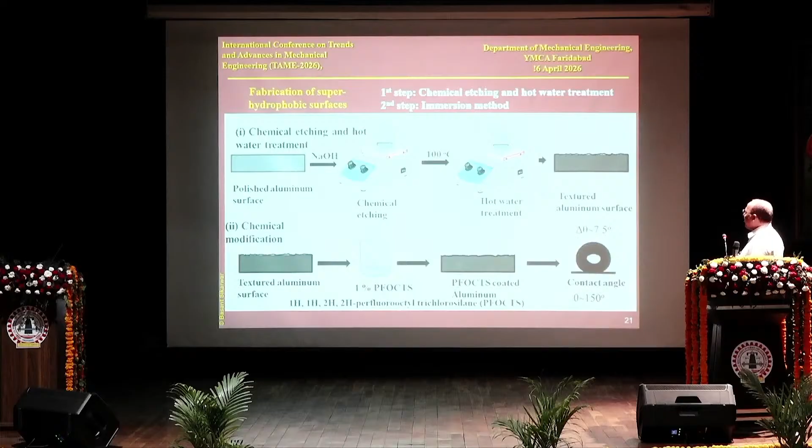This is the patterned wettability surface - a very unique surface from our latest publication in the International Journal of Heat and Mass Transfer. We use plasma etching as well as masking, and hot water treatment, chemical etching, to create a pattern of hydrophilic and hydrophobic regions.

This is the patterned wettability surface. The plasma etched surface has a contact angle of more than 150 degrees. The polished aluminum surface has a contact angle of around 80 degrees, and the hot water treatment gives a super hydrophilic nature, all these things.

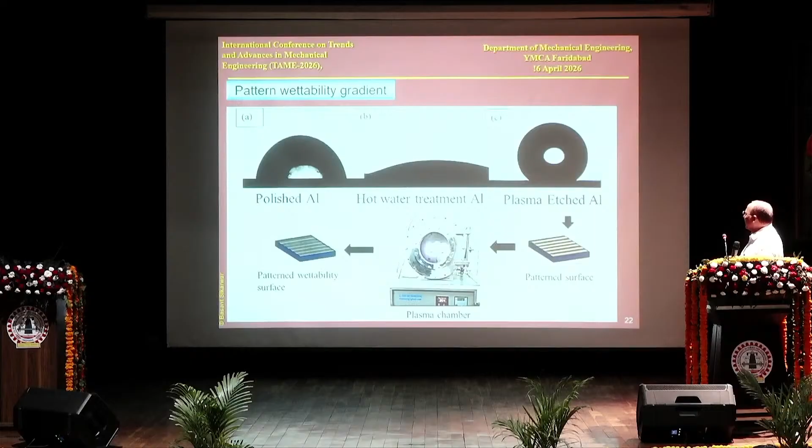This is the unidirectional method - how to make a unidirectional wettability gradient surface. This is a chemical method. We take the hot water treated textured aluminum surface and dip it in an ethanol solution, then slowly raise the surface so that a gradient is formed like this.

Another method we use is plasma etching. What we do is put the surface and expose it to plasma at different time steps, these kinds of things.

So we create a wettability gradient uniform surface. Next slide. This is the experimental setup, lab scale, in our department in my lab.

Especially we have to demonstrate the surface performance in moist air condensation, and this surface has a uniqueness. We have to create environmental conditions like relative humidity and different temperatures. Nowadays it's very hot, relative humidity below 40, temperature more than 30, 37 like this, and this condition is not appropriate. Especially for generating atmospheric water, the more efficient conditions are when relative humidity is more than 60% and temperature is 32 to 37.

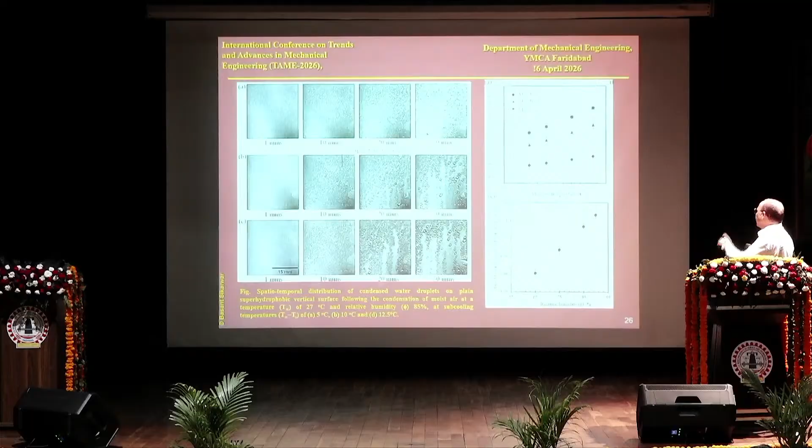These are the patterns, especially this pattern in super hydrophobic surfaces. This is vertical orientation, different degrees of subcooling, rate of condensation in liters per meter per hour. This is the super hydrophobic downward facing condensation here. The droplet grows and slides, and the previous one is vertical. These are the trends of rate of condensation with respect to relative humidity.

Next slide. This is for a unidirectional wettability gradient surface. You can see here, these are the data showing the rate of condensation on different kinds of surfaces.

This is the vertical plain super hydrophobic, vertical pattern super hydrophobic surfaces. You see that the vertical pattern surface under gravity is less effective. But in a horizontal plain superhydrophobic surface, horizontal wettability gradient, you can see it is very effective on these surfaces.

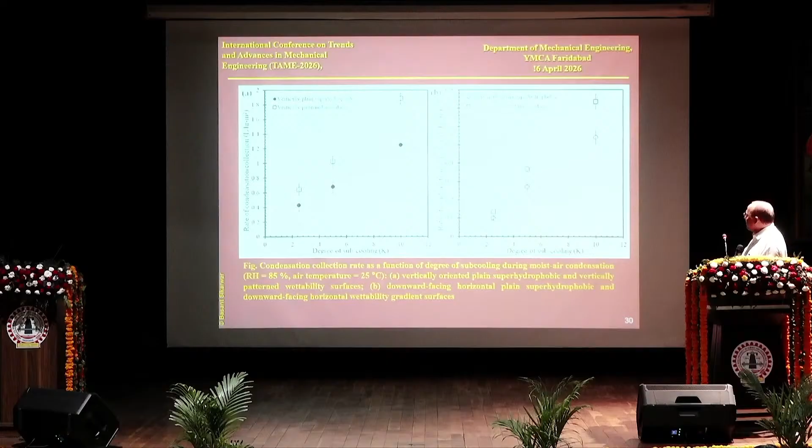So can you run this? Condensation on pattern surfaces. Next slide, click next. This is condensation of super hydrophobic surface. This is condensation of the previous one. Go back, I think this is interesting for you people. So first is condensation on a patterned wettability surface.

So what happens? Especially condensation occurs on the super hydrophobic surface, and the hydrophilic part acts like a passage, so it removes that. So condensation on super hydrophobic vertical surface.

Can you click on this video? Please click on this video. Next, the middle one, yes. So what's happening? You can see the condensation, then they slide off by gravity.

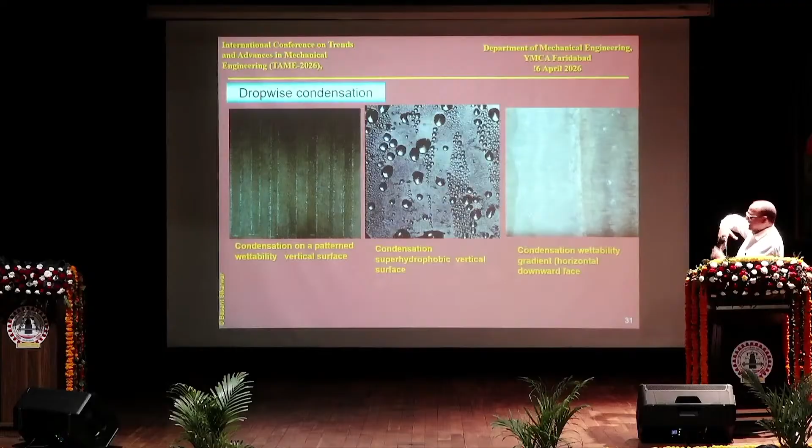But this is a wettability gradient surface, and this is downward facing. Downward facing, like this is vertical facing - both are vertical facing where gravity plays a role, but this is downward facing. Can you run the last one? So what happens - this is the passage. The drop grows here and slides towards the lower wettability to higher wettability side. So gravity does not play any role to remove these droplets, and this surface is very, very effective in microgravity kind of conditions.

Next please. These are the atmospheric water generation schematic diagram layout. These are the different cooling technologies we are using for generating water. We use loop heat pipes and pulsating heat pipes for enhancing condensation.

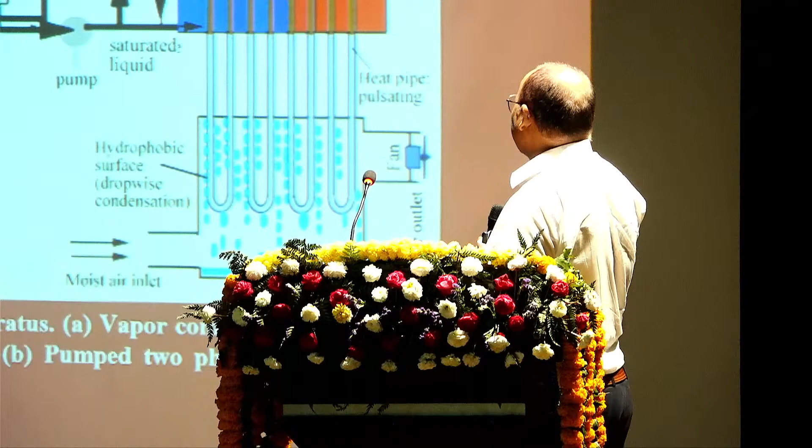Next slide, can you click on this picture? This video, yes click. So this is the device we developed recently. We already have a patent, and now we are testing it in many places. It has a capacity to generate 25 liters per day at relative humidity of 85% and temperature of 32 degrees Celsius.

Please next slide, next.

So I'm just summarizing all these things. You people are hungry and lunch is already over, so I won't take too much time and will hurry through these things. If you have any doubt or questions, we are free to talk to you during lunch hour.